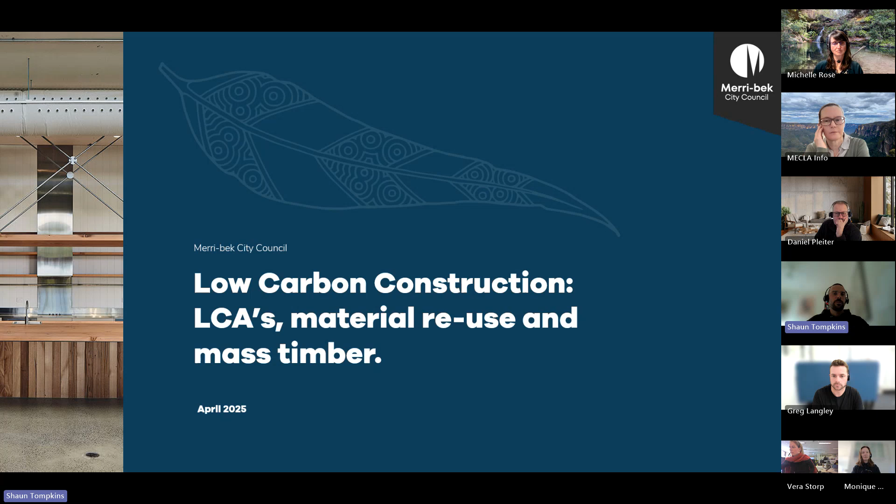I've got a slightly different slide deck here, which I'll give you more context for in a moment. I slightly changed the title to Low Carbon Construction: LCAs, Material Reuse and Mass Timber, trying to focus on a few specific things.

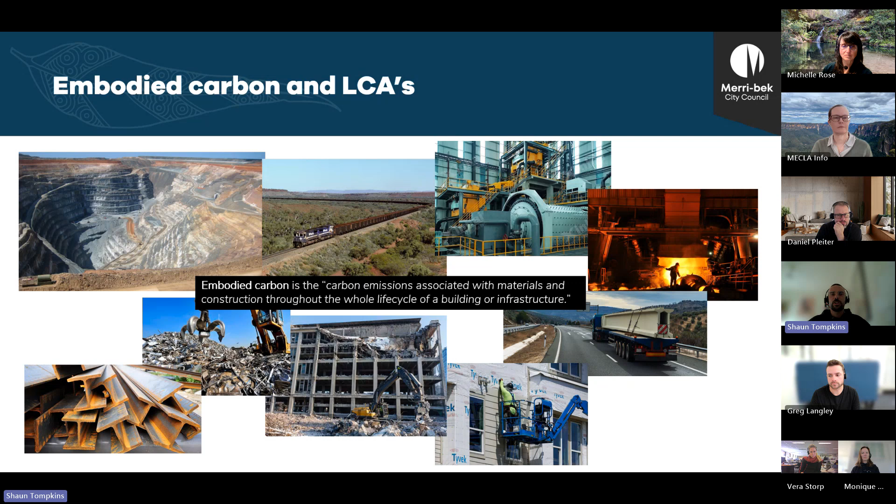Embodied carbon is all the emissions associated with materials - from extraction out of the ground, as you can see top left, transporting those to processing facilities, processing, bringing them to site, assembling, and eventually maintaining and removing them at end of life. All those images represented as a table are the A1 through to D life cycle stages.

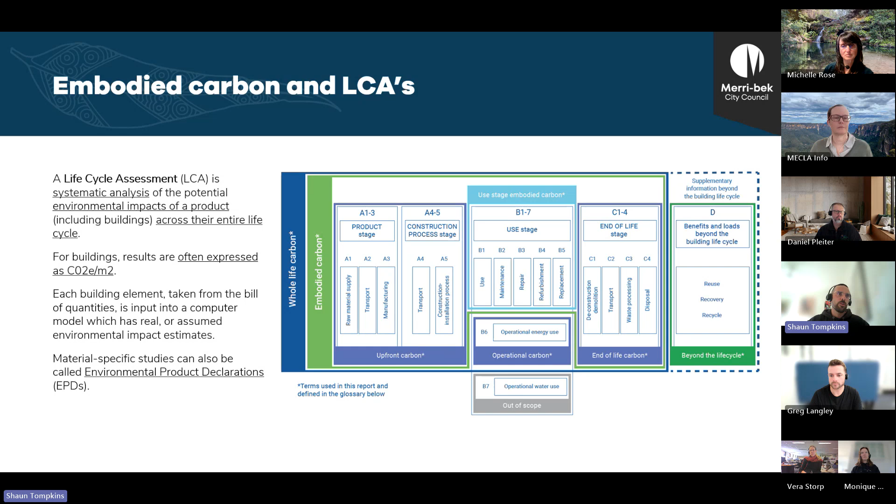LCA is just a systematic analysis of environmental impacts, and for buildings it's generally expressed in carbon per square meter. For a material specifically, it would be the EPD. I always like to run through this one in particular to scare the shit out of people into action.

So why are we trying to measure and reduce it? To keep up with population growth, we unfortunately need to build the equivalent of a New York City every month for the next 40 years. So even if we're building out of leaves and mycelium, it's a lot of volume to assemble and manage - that's a building approximately 230 billion square meters, or the size of Romania, over 40 years. Just to put that into perspective.

And when we use the embodied carbon baseline from our LCA, that would create over 131 billion tons of carbon - and that's excluding infrastructure, just for the buildings. I think that's about 6 years of total global emissions - all the emissions on the entire planet - like 5 of those years is just on the buildings over 30 to 40 years. So not insignificant.

In terms of its contribution to Australia's emissions, embodied carbon is approximately 16% of built environment emissions, and 10% of our total carbon emissions.

And it will challenge organisations and local, state and national governments to achieve their net zero carbon targets. I think we are well on our way to having the operational side of things sorted as the grid decarbonizes, but the focus needs to really turn to the materials.

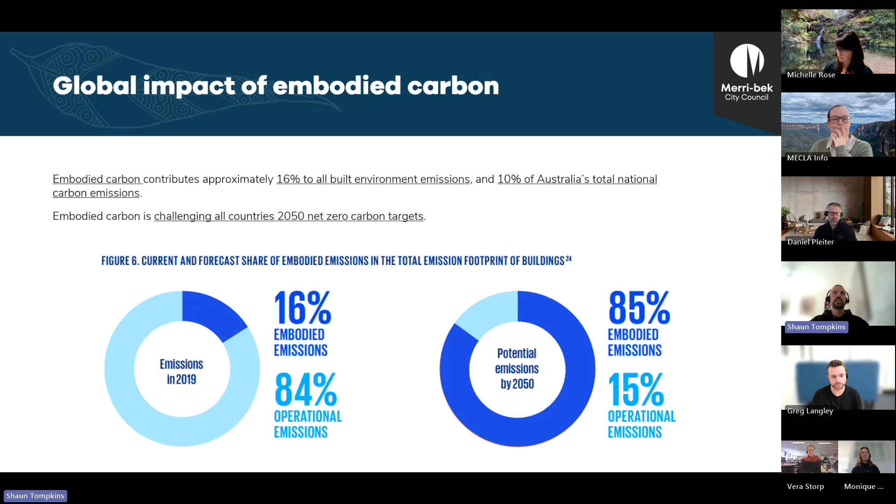We have an addiction to concrete. It's an amazing material, it can do everything we want, but it alone is responsible for 8% of global carbon emissions. To put that in perspective, all global aviation is maybe 2% of emissions worldwide, and animal agriculture is responsible for about 13 to 15% of emissions. So just the production of concrete is almost all of the food that we grow.

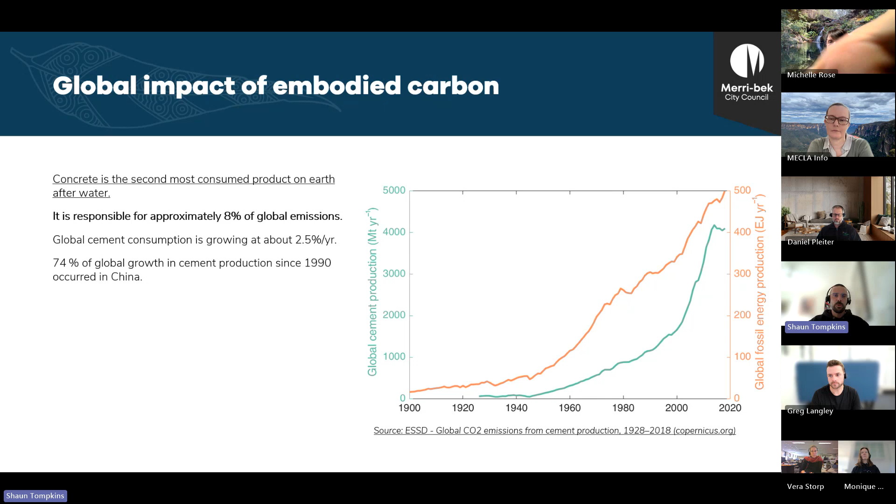You can see on the graph on the right, I imagine this has changed, that's from 2018, but you can see the green line is cement production, which seemed to have plateaued, but the emissions from that had increased. Probably in the last 5 years with some of the green cements we've seen, the emission intensity is probably dropping, although I'm not sure how much of those claims are reliant on purchasing offsets compared to producing the cement, the clinker, and the final product in a more sustainable way.

Saxon Street was the name of the project before. It's recently been renamed, I think it's Ballam Ballam Place. It's a community cultural arts precinct in Brunswick. There were traditionally a couple of older buildings on there, and we've retained some of those, but we've built this large 5-story gallery and art workshops in there as well.

There's one tenant that has the whole site, and it was kind of before my time. I came on board, my role was created 18 months ago. Some smart person had already somehow worked it onto the planning permit - I don't know how they got it onto the planning permit - but it said that we had to do an LCA of the building. So I came on board, and I have a background in planning, and was reading the planning permit and was like, oh, I don't think anyone's actually actioning this permit condition.

So I went to the contractor and the manager of the building team and said, hey, if they've signed a construction contract that says they're going to build the building as per the planning permit, which is kind of what the wording was, then they should also be doing the LCA on behalf of us as well.

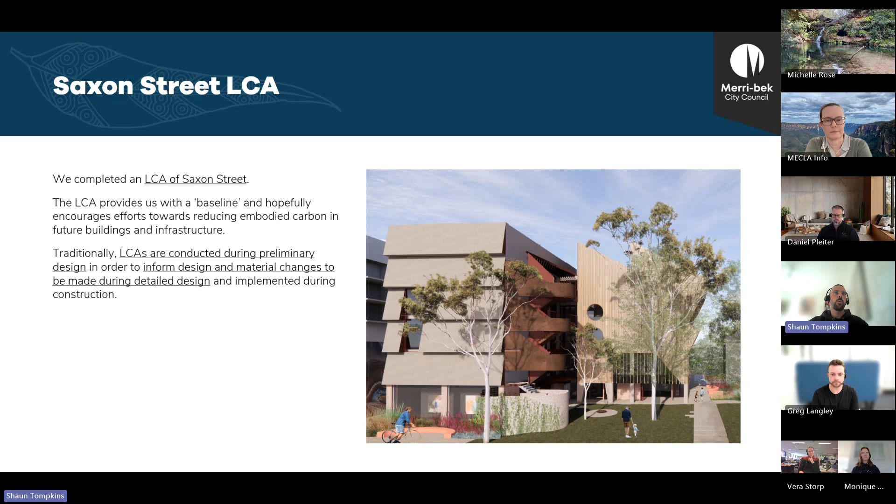We just wrote a scope for what the LCA was, which was essentially we wanted to get the embodied carbon impact of the new 5-story building, shown in green on the right hand side, and we wanted to get a comparison against the base case and then the as-built and optimized, which would have more innovation and timber in it.

We wanted to estimate the embodied carbon we save by retaining the other structures on site. There's the blue one immediately to the north, and then there's this other structure here in pink, which was partially deconstructed and rebuilt a different way - it's now an indoor-outdoor space, not a closed-in building. We wanted to do that so we could pat ourselves on the back and go back to the project managers that had made that decision and say, hey, look, you did a good thing, you saved X amount of carbon.

We wanted to identify the most carbon-intensive materials on site, which we already know are going to be concrete, steel, aluminium, and glass, but we wanted to get that in a nice list so we could put it forward to the project managers. And we wanted to get some recommendations for future projects, not just in the materials - and I think this is equally as important - but about processes within the organization and checks and balances and what policies we are measuring projects against.

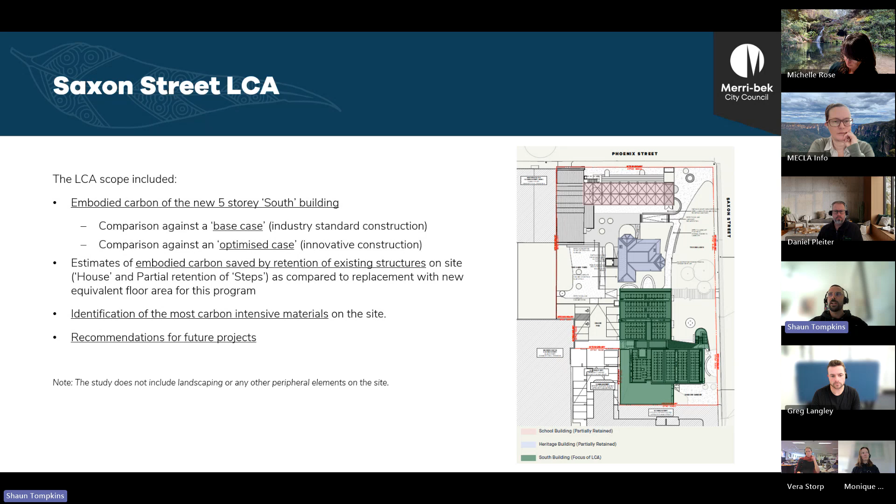And there's a whole lot of behavior change and organizational change that I think this project has raised, and people are slowly starting to realize.

So the report itself, including all the spreadsheets that came at the back of the One Click LCA, was hundreds of pages, but we've got these pretty little graphs that were generated.

And that was with—we did have some fly ash in the cement, we did have Durra Panels in some of the ceilings and walls. For those who don't know, Durra Panel is just recycled straw pressed into a rigid panel. It's a company that's been around for 60, 70 years. I think there should be more of it used. And then some of the recycled bricks that we had there as well.

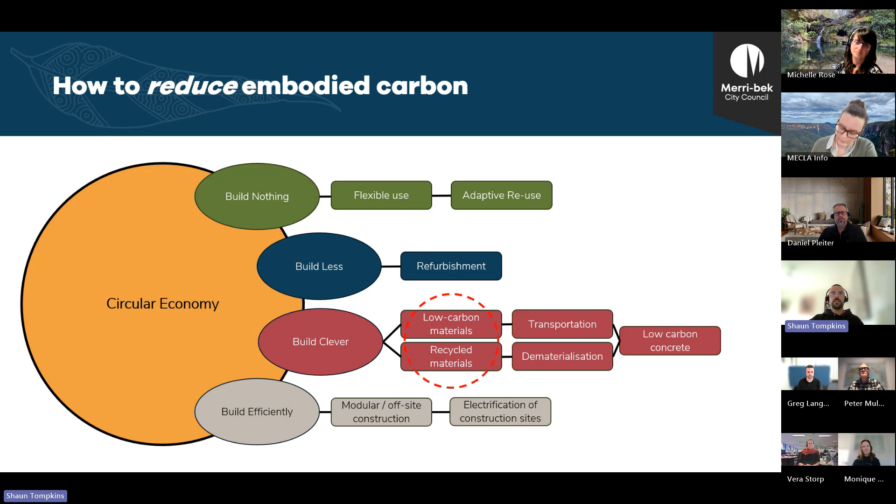Just real quick, the two examples here are build clever with low carbon materials - going for mass timber is a really big one. There's a really good example: Eric Tweedale Stadium in New South Wales. There might be someone on this meeting who knows more than me, but it's a hybrid concrete and mass timber building. It saved 130 tons of CO2.

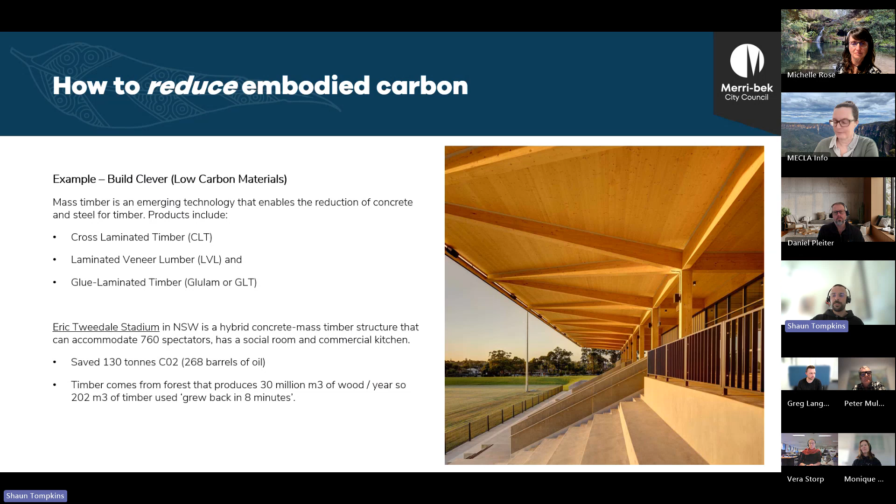It says the timber comes from a forest that produces so much timber it would grow back in 8 minutes. I'm not sure how real or fudged those numbers are, but at least you start to connect the dots of using a material that can be replaced and eventually grow back, where concrete we'd need another event and a couple hundred million years to turn into dust. And the building looks great as well - you don't lose anything by increasing the timber.

And then this other one is a good example of build clever with recycled materials. This example is in Richmond in Victoria, called Sanders Place. It was a warehouse from the 70s or 80s.

You've just muted for me. I don't know if anyone else has the same issue. Can you hear me? Yeah, we can now. Oh okay, yeah, apologies, my headphones just decided to die without any heads up.

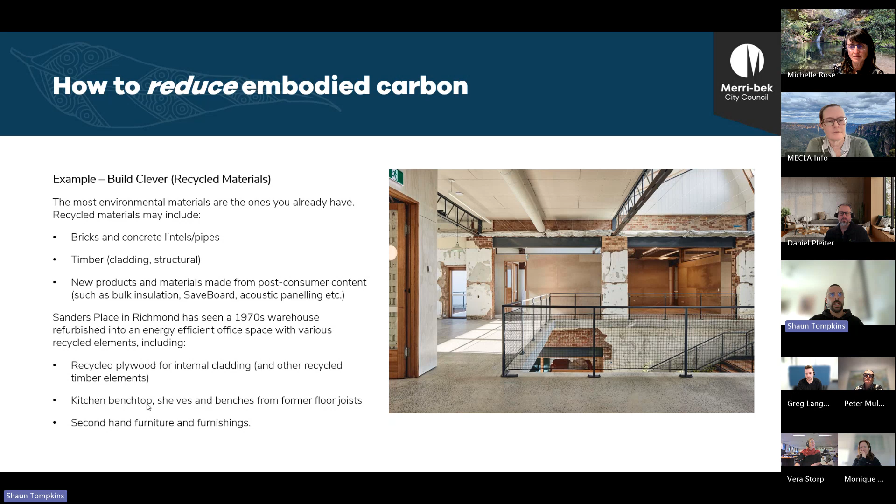You can see here they've used recycled plywood for internal cladding, and other recycled timber throughout the building. The kitchen, bench tops, the shelves, and all the furniture is secondhand. And you can see some more pictures here. They've even kept the ground slab and just drilled holes penetrated through to get plantings on the underside. And they use shade sails at the top to close off.

And the ESD consultants that worked on Sanders Place, now this is their office. They consulted on this project and now they work out of this building.

So the point I'm trying to make with this one, particularly internally with project managers and the decision makers, is refurbishing doesn't mean that it's ugly or it can't meet our requirements. Anything's possible. I think my personal feeling is that it's a lack of creativity.

And probably we default to a handful of building designers, and we give them a narrow scope, which is generally, we want to knock this thing down, as opposed to going out for an expression of interest on a square meterage that we need, and letting the architect and the market kind of tell us whether that's possible or not.

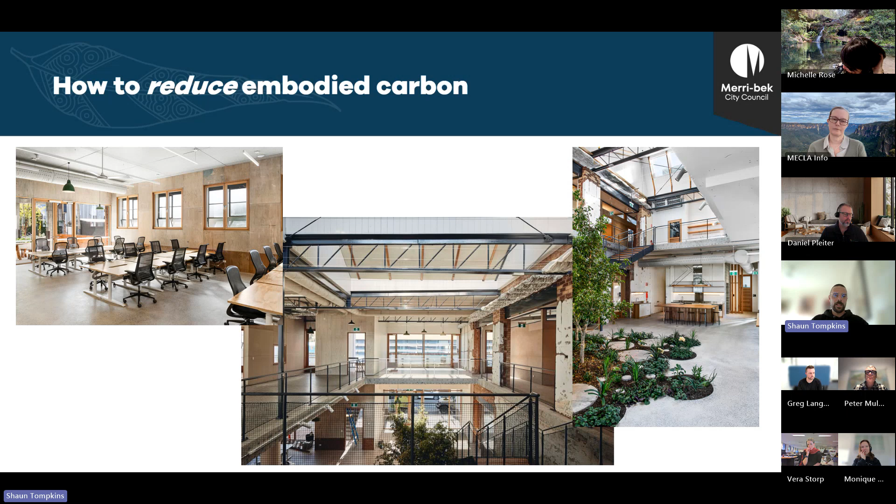I think we're doing too much half-cooked analysis and then telling someone that it's too expensive to refurbish it. That's my 2 cents. So what's next at Merri-bek?

You can see this beautiful picture on the right. That's an internal shot for Sanders Place, which is a little bit David Lynch, White Lodge at the end of the season there, but beautiful carpet.

So we're continuing to embed and trial recycled materials in our smaller building projects. SaveBoard's another good one, it's like a compressed Tetra Pak. We've got that at least on the drawings of a sport pavilion that we're doing at the moment. And then obviously magnesium oxide board, trying to get that in to replace the fiber cement.

We're writing a sustainable infrastructure policy, so that's kind of talking more to the footpaths and the asphalts and everything else in between the buildings.

But we're updating our tech notes now to have a preference and an example specification for recycled content. So at the moment, we default to Vic Roads spec with asphalt, which is good in a sense, where Vic Roads has 20% recycled asphalt, but it's not clear on the tech note, so we're just trying to update those things.

But even that, the unruly nature of having to update 300 tech notes across the organisation that are owned and managed by 8 or 9 different teams, even trying to find where the PDFs live inside the cloud and who edits the CAD drawings. Even going to those small details is prohibitive to why these changes don't get made.